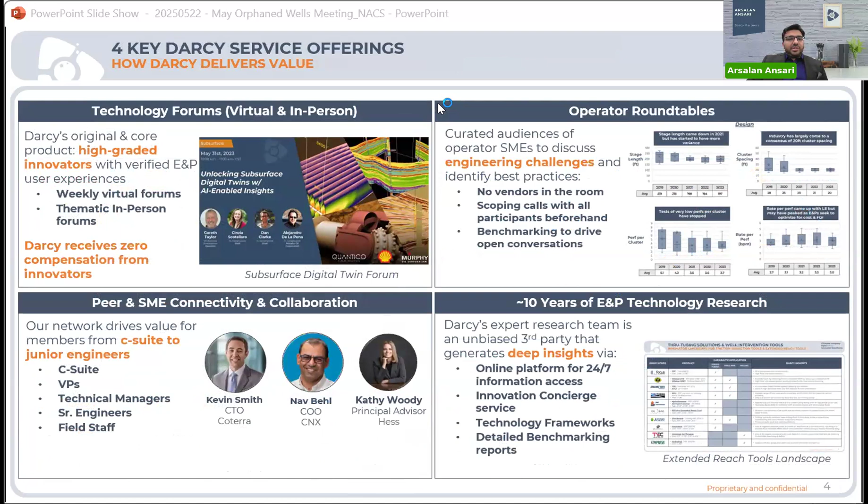We do this through curated technology forums, sometimes virtual and sometimes in person depending on geographical locations, operator roundtables, peer connectivity and collaboration on industry challenges, and almost a decade of research across 4 key channels or research coverage areas, each with several specialized sub-channels, as shown in this slide.

So with tighter regulations and rising CCS activity, maintaining well integrity in plug and abandonment is increasingly challenging. Despite advances in cementing, issues like surface casing vent flow and gas migration persist. Next generation P&A materials are essential for reliable, long-term gas-tight isolation and more efficient abandonment operations.

So let's have a look at some of the key trends for orphan wells with surface casing vent flow issues in the US and Canada.

While documented wells in regulatory reports number around 180,000, estimates suggest true figures could be as high as 800,000 for some of the unreported wells.

Canada, Ohio, and Pennsylvania lead in casing vent flow issues due to stringent regulations and active drilling. Oklahoma, Kentucky, and New York show moderate cases, while Alaska, Alabama, and Michigan report fewer cases due to limited drilling and operators complying with the relaxed policies by the regulators.

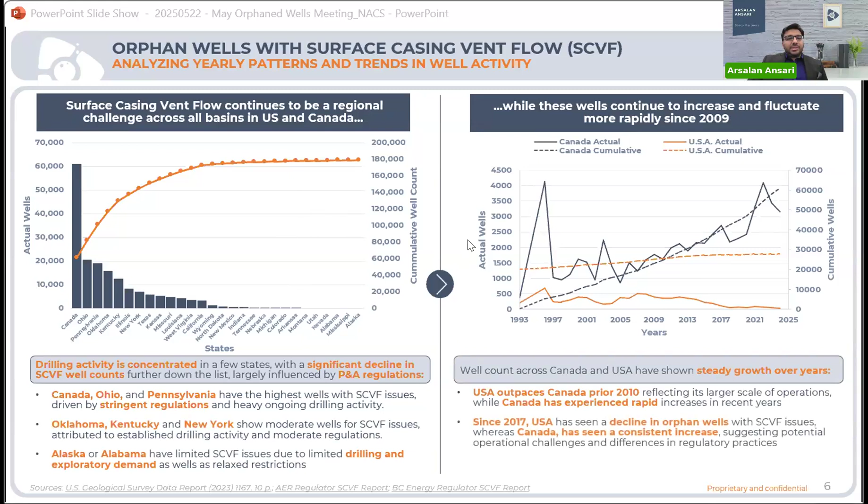Over the years, well counts for casing vent flow issues have steadily grown, with the US historically outpacing Canada prior to 2010. However, since 2017, the US has seen a decline in orphan wells with casing vent flow issues, while Canada's numbers continue to rise, pointing to operational and regulatory differences.

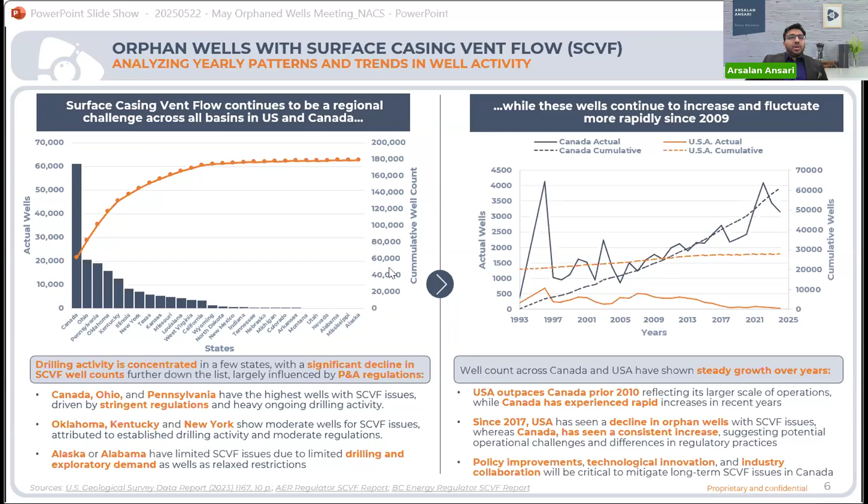Moving forward, addressing these challenges through policy improvements, technology advancements, and industry collaboration will be key to mitigating long-term casing vent flow risks. Also, it's estimated that 66% of more than 900,000 onshore oil and gas wells are marginally productive or nearing the end of their life.

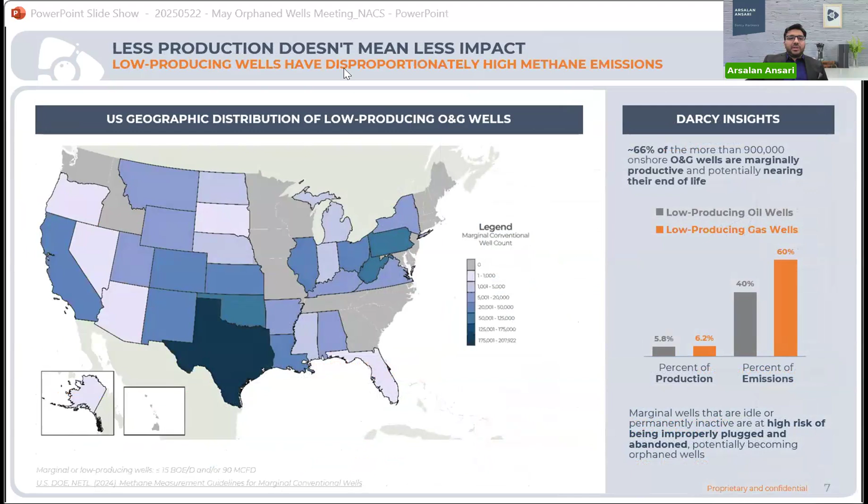These idle or permanently inactive marginal wells face a high risk of improper plugging and abandonment, increasing the potential for orphan wells. Now let's explore some of the operators' perspective on plug and abandonment challenges.

In a recent Darcy Forum poll, regulatory approval and compliance emerged as the biggest hurdle, even with growing CCUS activity. Operators are shifting towards cost-effective, rigless PNA methods. About 37 to 42% of operators aim for rigless decommissioning using lightweight vessels, resin-based plugs, and remote monitoring. However, concerns remain around the long-term reliability of these lower-cost solutions.

Meanwhile, 32% of operators focus on plug durability and 26% on well integrity or CO2 storage. This shows that PNA is critical for future energy applications like CCUS and geothermal, driving demand for next-gen sealing materials, expandable plugs, and AI-driven monitoring.

On the right-hand side, we look at the CCUS activity trends, and we can see adoption is accelerating with near doubling of advanced stage facilities with a 60% rise in construction activity. But infrastructure bottlenecks, supply chain constraints, and policy gaps create regional disparities.

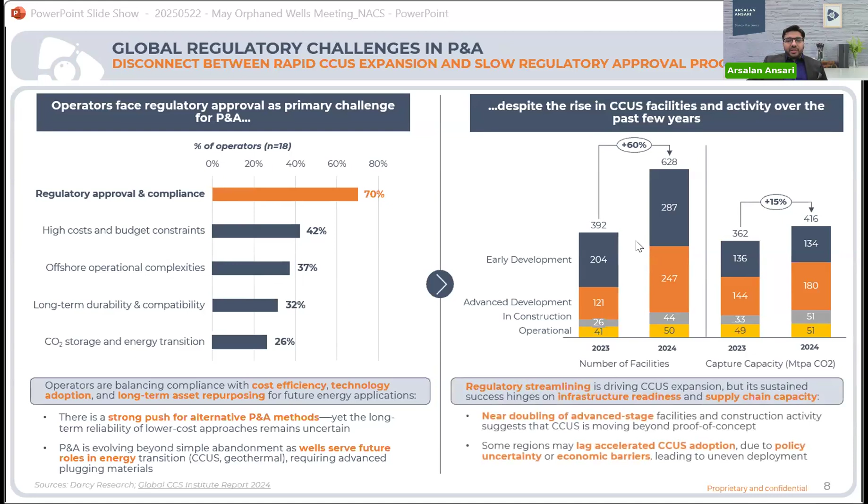Moving forward, PNA is no longer just about abandonment. It's about ensuring long-term well integrity for energy transition. Advancing policies, technology, and collaboration will be key to tackling these challenges, especially to align regulatory frameworks with rapid CCUS growth.

Now let's switch gears to evaluate global regulatory challenges in plug and abandonment. Non-routine operations where alternatives to cement are used require deviation requests, extensive documentation, and strict verification, leading to delays, adding regulatory burden to operators. While US regulators allow variances for novel decommissioning methods, long-term well integrity remains the top priority.

Overall, in a nutshell, regulators are beginning to accept alternative materials for permanent well stability globally, and advances in resins, polymers, expandable plugs, and bismuth could lower costs, but there's a slow adoption rate with limited field trials.

Next, we'll take a moment to review the key challenges operators face with plug and abandonment materials, as current solutions often fall short to address the problem effectively. A permanent well barrier must provide a tight seal, precise placement, and long-term stability against mechanical, thermal, and chemical stresses.

Firstly, plugging materials should have very low permeability, almost less than 10 microdarcy, and must bond effectively with casing cement and the rock formation to prevent leaks. Interestingly, field trials show that smaller incremental applications can become better than large slugs, but this sometimes conflicts with the operator's preference for faster P&A operations and cost cutting.

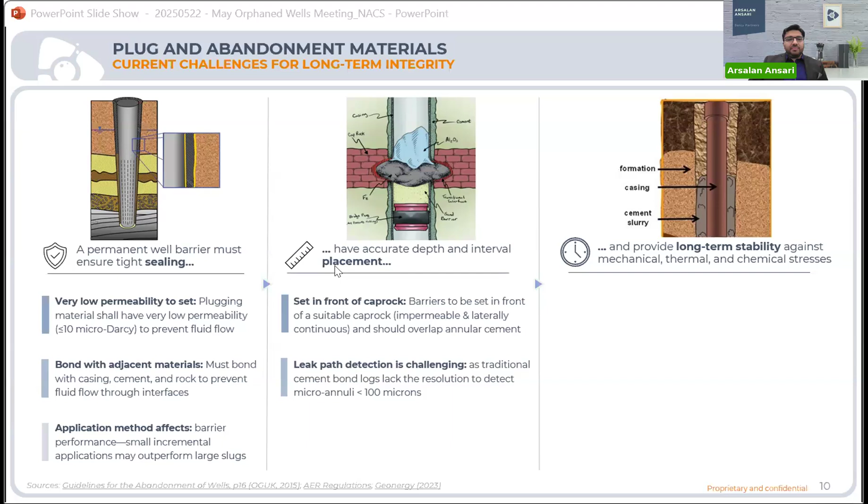Secondly, barriers must be placed in front of impermeable cap rock and overlap existing cement. Again, the challenge is detecting the precise leak paths, which is difficult since traditional logs can't identify tiny microannuli. Regulators emphasize sealing external paths, so placing barriers outside the casing is critical, but yet challenging.

Finally, barriers must resist degradation from pressure cycles, temperature changes, mechanical stress, and chemical exposure. Ultimately, ensuring long-term integrity requires precise placement, thorough testing, and confidence, ideally with reliable monitoring or self-healing materials, as current solutions don't guarantee permanent sealing.

Now let's switch gears to explore the evolution of P&A materials ranked from left to right based on long-term integrity and cost. Starting with cement, the most widely used material, but prone to shrinkage, cracking, and gas migration. Innovations like microfine self-healing and expandable cements aim to improve its sealing performance, along with thermal cement specified for oil sands. Innovators in this space include Astrimar, Expro, Trican, Schlumberger, and Baker.

It's important to clarify that cement remains a fundamental component of well abandonment and integrity management. And the technologies discussed here are not replacements for cement, but rather complementary solutions that address specific challenges such as sustained casing integrity, gas migration, and healing requirements, where enhanced sealing is required, not as a full-scale replacement for cement.

Next on the list, we have non-settling grouts and bentonite that offer sealing, self-sealing properties and are well suited for temporary abandonment, but they can swell excessively and shrink in dry conditions. Companies like BeneTerra and FloPetrol are advancing these solutions with moisturized and self-healing bentonite blends.

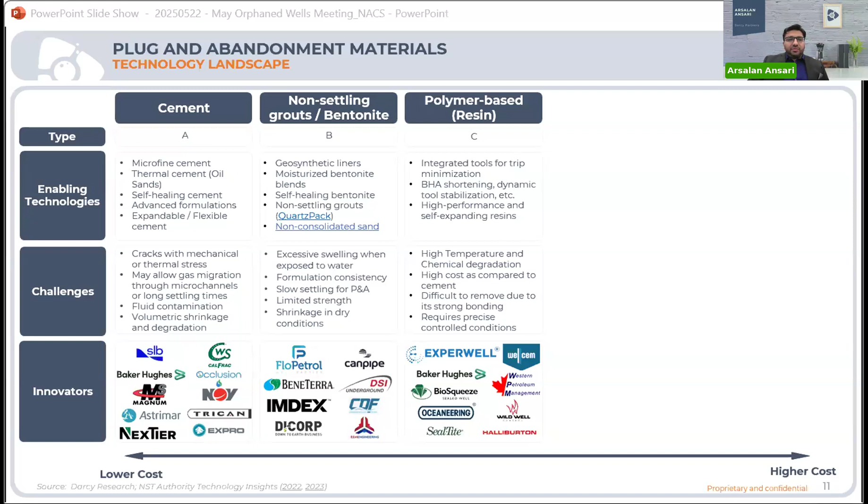Thirdly, we have resins or polymer-based plugs. These provide particle-free, high-strength sealing, but come with challenges like high cost, difficult removal due to strong bonding, and the need for precise curing conditions. Companies like Experwell and Welcem lead in this space with thermosetting polymers.

Fourthly, we have the elastomer-based expandable plugs that include expandable liners and rubber-like polymeric plugs, offering flexible sealing but have possibility of degrading under extreme pressures. Advanced formulations like thermoplastic elastomers and advanced rubber compounds are improving longevity with innovators like Weltec, Pinnacle, and Winterhawk.

Lastly, we have the thermite and bismuth-based alloys that create metal-to-metal bonds for permanent sealing, leveraging bismuth's low melting point, high density, and expansion properties in sustained casing pressure scenarios. However, they do not replace the fundamental role of cement in well abandonment. While promising, these solutions face challenges with scalability and reaction control. Notable innovators in this space include Interval, BISN, Isolate, and Wellstone. The landscape of P&A materials continues to evolve with the goal of reinforcing cement's performance rather than eliminating its necessity.

Taking a step further, we compared innovators in this space, focusing on the technology benefits and considerations for each of the bismuth-based plugs. Interval stands out as the only provider using thermite to create a permanent gas-tight barrier by melting casing and cement with the thermite reaction. Benefits include open-hole sealing without section milling and high barrier placement confidence. However, there are high temperature considerations and one-shot limitations for re-entry of these wells.

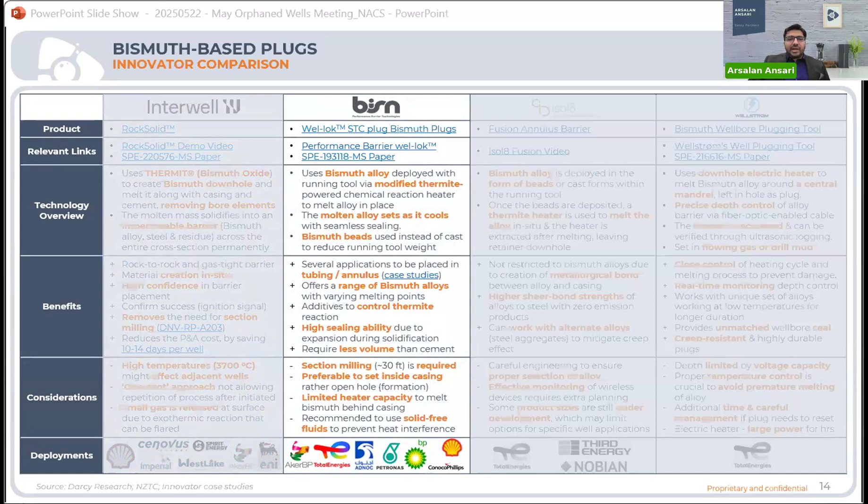Thirdly, we have Isol8 that uses bismuth-based alloys with high shear bond strength to steel, ensuring zero emissions. They have successfully been deployed in 9 trials with Total, Nobian Energy, and others, but selecting the right alloy is crucial for effectiveness.

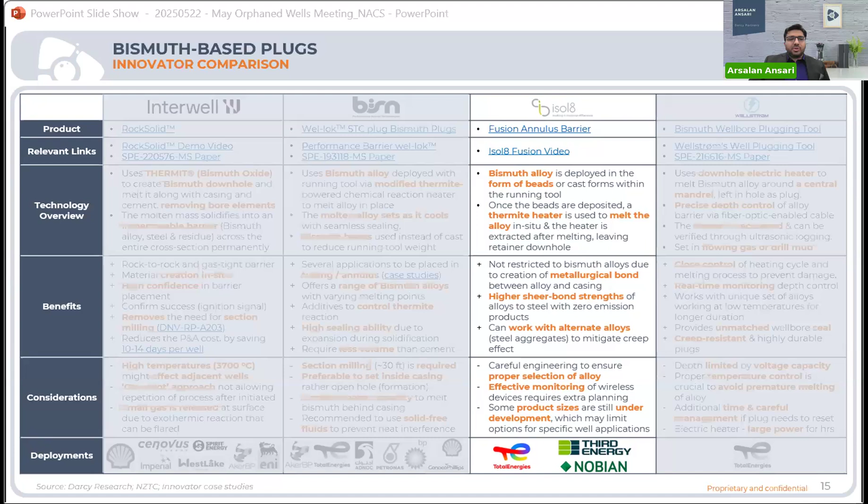Lastly, we have Wellstrøm's technology that's currently in trials with Total Energies in the North Sea, but it offers precise depth control using a downhole electric heater to melt bismuth alloy. However, plug depth is limited by voltage capacity in deep wells beyond 4,000 meters, and careful temperature control is essential.

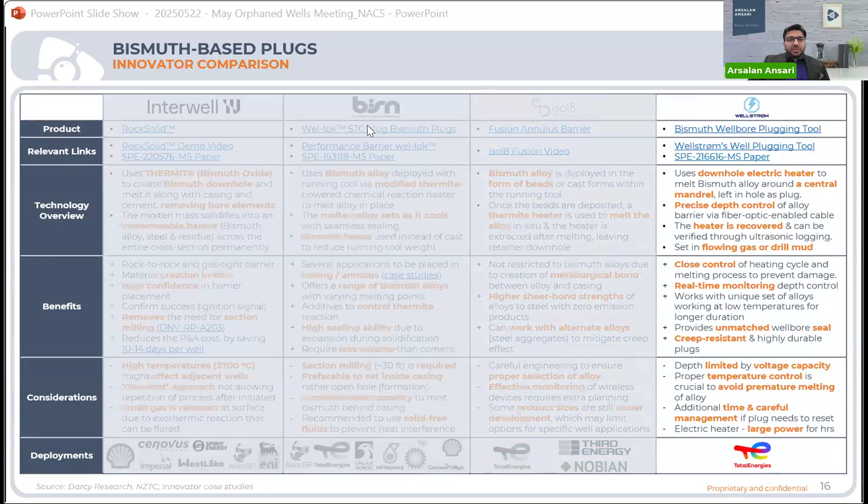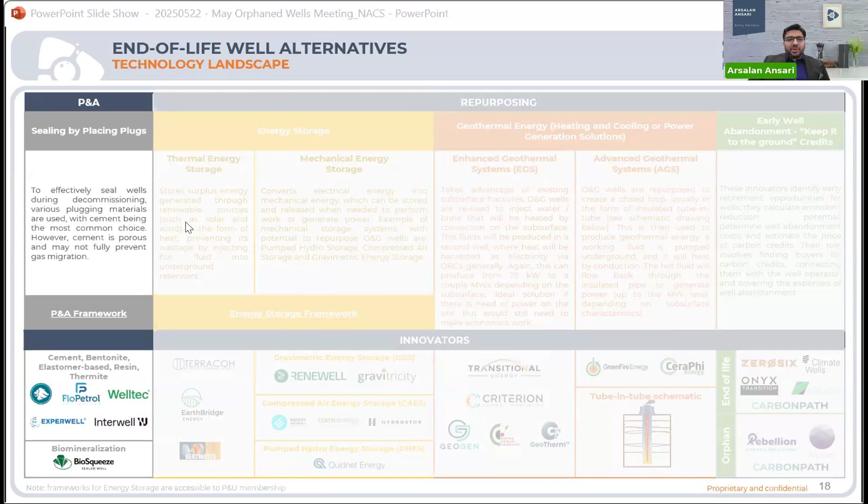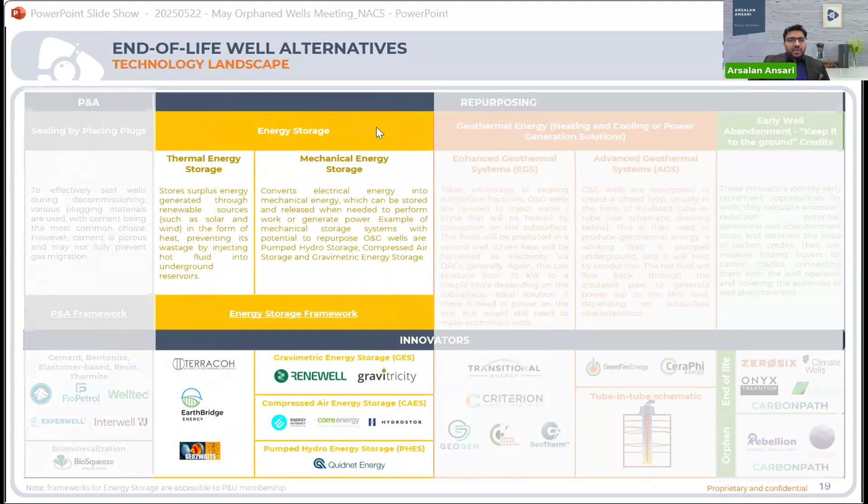Thermal energy storage stores surplus energy generated through renewable sources such as solar and wind in the form of heat, preventing its wastage by injecting hot fluid into underground reservoirs. Innovators like Renewell have been expanding in this field.

Thirdly, we have geothermal energy that takes advantage of existing subsurface fractures. Oil and gas wells are reused to re-inject water and brine that will be heated by convection on the subsurface. These fluids will be produced in a second well where heat will be harvested as electricity via ORCs generally. This can produce from 75 kilowatts to a couple of megawatts, depending on the subsurface. An ideal solution if there is a need of power on site, but would still need to make economics work.

We also have advanced geothermal systems where oil and gas wells are repurposed to create a closed loop, usually in the form of an insulated tube, as shown in the schematic below. This is then used to produce geothermal energy as the hot fluid will flow back through the insulated pipe to generate power.

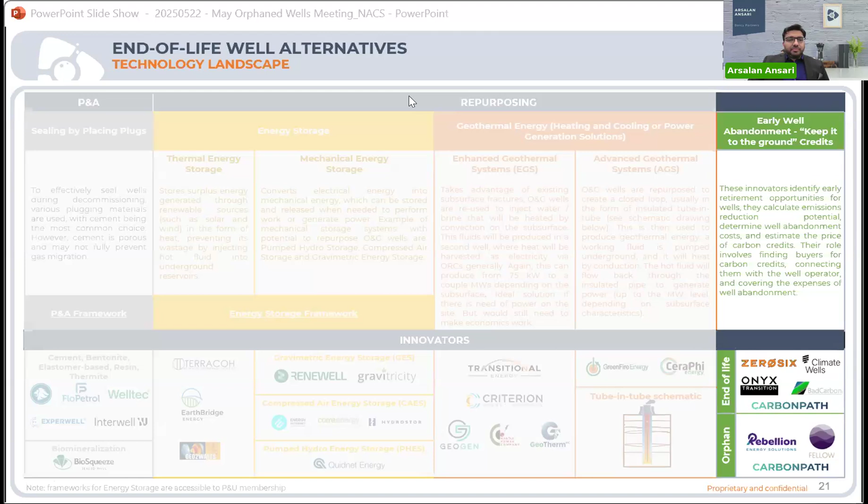Lastly, we have early abandonment, which is tied to carbon credits. These innovators identify early retirement opportunities for wells based on the emissions calculated, determining the well abandonment cost and estimating the price of carbon credits. Their role involves finding buyers for carbon credits, connecting them with the well operator and covering the expenses of well abandonment. These solutions show how P&A is shifting from a closure activity to an opportunity in the energy transition.

So to wrap up, I would share this is one of the Darcy events that was conducted a couple of months ago.

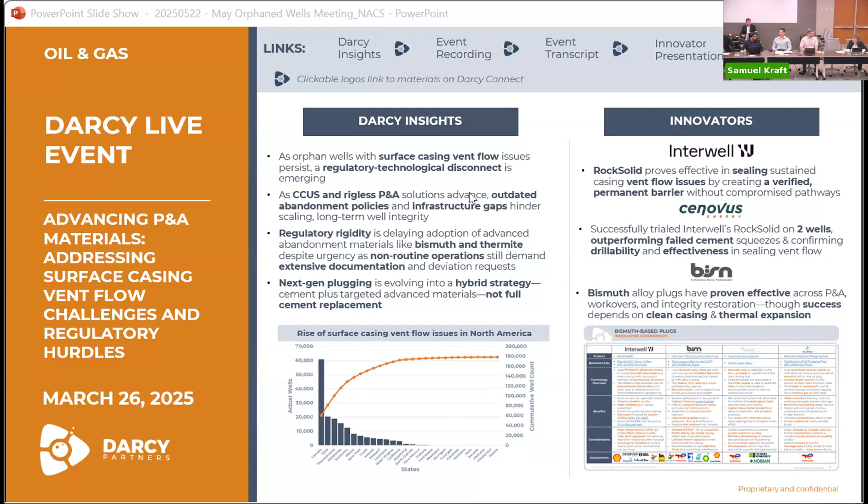I have a question. You mentioned a technology that melts the casing, the cement, and the rock. What technology is that? There's been similar discussions around in Pennsylvania, but I don't think, to my knowledge, we use that. Are there any places where that's been used? It has been heavily deployed in Canada, about 50 to 55 wells, with multiple operators. In the US, it's still under trials with some operators, but hasn't been tried extensively in the US.

It's more of a trial because of the CCUS projects in Canada, to utilize some of these wells as future CO2 storage. That's been deployed mostly to address annular pressure issues - any surface casing vent flow issues, high annular gas migration pressure - and it has proven to provide 100% leak resolution there. The only challenge is sometimes operators are more concerned about getting a second leak value that comes below the remediated interval. That's where they're concerned about re-drilling these thermite plugs and not being able to re-enter back into the same hole. So that's the biggest consideration operators and regulators weigh while deploying some of these plugs.

In the 50 to 55 cases that were successful, what kind of pressures were they dealing with? Is there any limitation? They have had - no, they're not limited by pressures or temperatures. They've seen pressures go up to 2000 PSI and dealt with that. And when it comes to deploying this for re-entry of these technologies, Cenovus Energy has tried and drilled back one of their plugs successfully and covered it with the liner. So that has been successfully tried. Thank you.

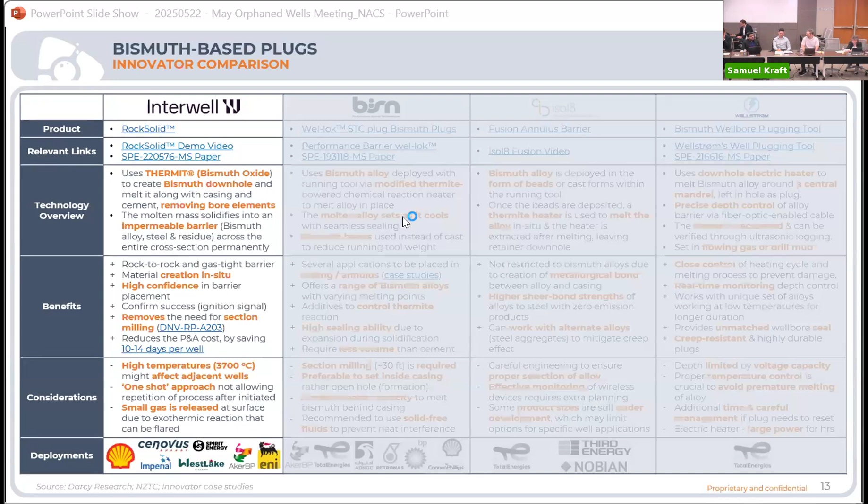Adam? Thank you, a great presentation. I wonder what you can share on costs, either actual costs if you can share those, or relative costs. With Darcy Partner, we provide more of an innovator comparison - a cost comparison between the technologies, which will be a multiple of like 1x or 2x, how each of these technologies compare to each other. But the actual cost comes when the vendors connect with the operators or someone who wants to deploy the technology, so normally we don't have the cost component shared at Darcy.

Can you speak at least relatively, which of these costs more and which costs less? Oh yeah, definitely. So Interwell and BISN have been almost 2x the price of what we have for the other ones, but relatively it depends on the application, it depends on how many plugs have to be deployed because it's a cost per plug. So it again depends on that, it depends on the conditions as well.

Can you speak at all to what percentage of a plug job cost is these technologies versus other things like labor? They come as a package - when we have our interview conversations with them, they come as a full package with regards to labor, rental equipment, and material cost. It's a lump sum cost that's offered, not like a cost per barrel or cost per footage, but a lump sum cost per plug.

And then they also have, depending on how many plugs are required in a well. As we mentioned, this technology cannot replace cement—it's used only for a specific application, just to seal off any casing vent flow issues or gas migration issues.

The testing that they've done with this, did they ever try to maybe drill out the plug once it was installed, or with the melting of the casing in that one example, is that just something that would be way too difficult?

So with their first trial, as I mentioned to Catherine, they had an issue with their plug not being able to seal and finding a deeper leak point. The micro-annulus had a second leak path. They had drilled it with a conventional bit - or was it a bit or a concave mill?

So they were able to drill it out and got back access to the entire wellbore, and they went deeper and did a second plug that was able to seal off the vent flow path, or the gas migration, that was coming to surface. Okay, thank you.

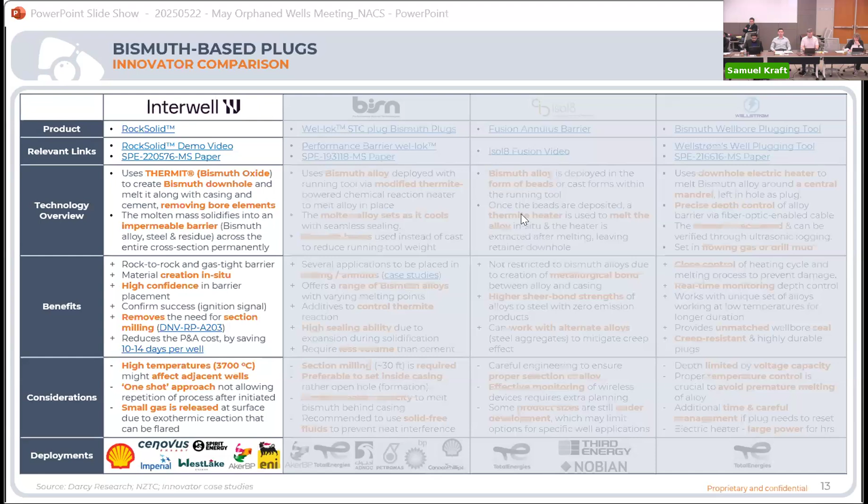We have a question from the online audience from Zach at DOE. Is that somebody we can plug in here? Here he is. Zach, can you go ahead? You're muted if you're attempting to speak. Can you guys hear me? Yes, we can hear you, Zach. Okay, great, sorry about that.

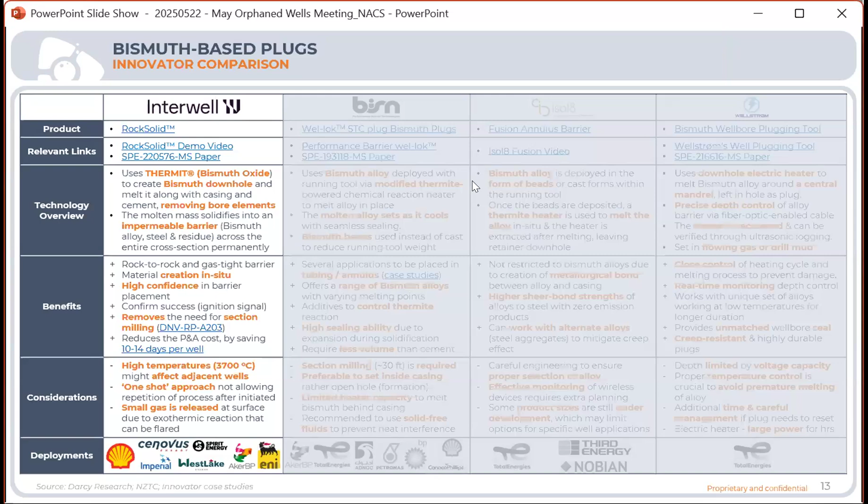When you say long-term, what exactly does that mean? Because at the site where I'm out here, we have to model and calibrate our PA to 10,000 years. With borehole permeability going anywhere up to about 200 years, especially in the area we're out here in Carlsbad, which is a huge oil and gas boom area, it's a concern of ours, because with all the oil and gas activity around our land withdrawal site, along with our existing wells, we fear that we're eventually going to end up with one water table. So with these additional new materials and methods, does it extend the lifespan of borehole permeability?

Great question there, Zach. 100%, I agree that when it comes to long-term, we don't have a timeline that's a guarantee, because of a lot of different challenges. For example, for some wells in Canada, there's a lot of nearby seismic activity that operators are faced with challenges because of the impact on their orphan wells. When it comes to defining the exact timeline, we've had discussions with operators, and there's not a defined timeline that they have mentioned or modeled.

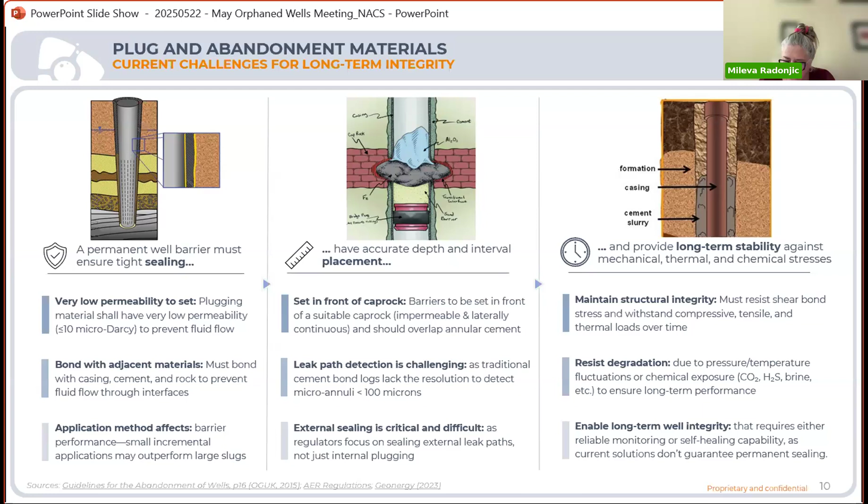Okay, thank you, Zach. Any other questions? Mileva, you've had your hand up and down through the morning. You have a question? Yeah, I thought we should give priority first to non-committee member audience. Yes, few things. Well, thank you very much, Mr. Ansari, for a very comprehensive overview of some of these materials and technologies.

Just to clarify, your company is not actually involved in any research or testing or application of these materials, correct? 100%, yeah, we are just researching and doing an overview of these technologies. We are not involved in the trials. We are getting to know from the operators.

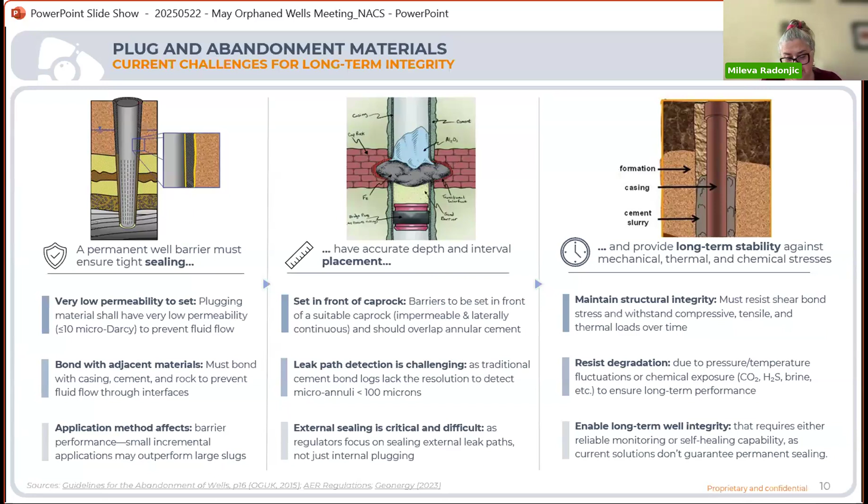Most of these have actually been shared at the SPE P&A forum in 2019, and these technologies have been thought about or tested in some places, probably for the last 10 years. On heating metal to metal, you might form a bond and seal there, but that heat creates potential issues for any water-rich materials such as clays and any cement that might be there, which do not do very well when superheated.

So I think I agree with Zach. Before we start giving seals of approval on these, probably some documented research is needed. I think it's a great compilation, good to see that these things are being initiated. As I said, some of them have already been in process for a while. But before we can start answering some of these long-term questions, the API standards on testing cements are a good example of how much testing is needed before we can say with certainty that something can last 50 or 100 years, like in the case of cement. So it was more of a comment than a specific question.

Thank you, 100%, I agree with you, Mileva. The high temperature concentrations are a concern for any nearby adjacent wells, because the temperatures go up to like 3,700 degrees Celsius. Lab testing, as per API standards, has been carried out, and we'll try to share that research at a later time with the team here.

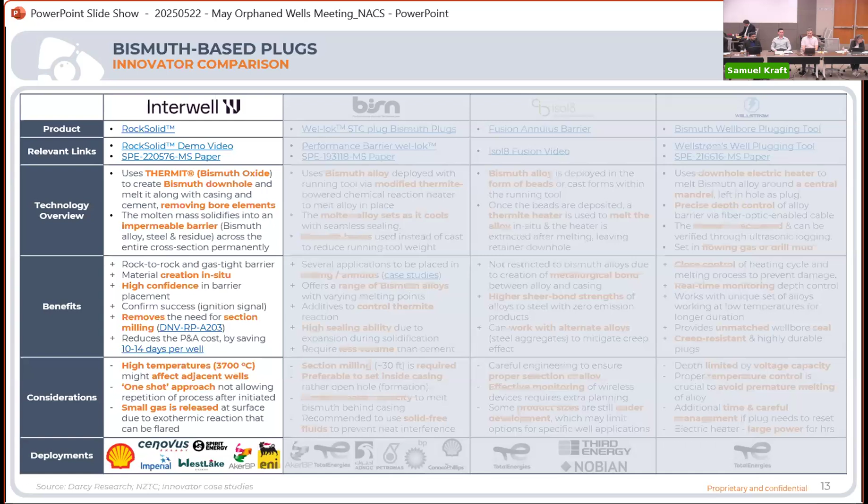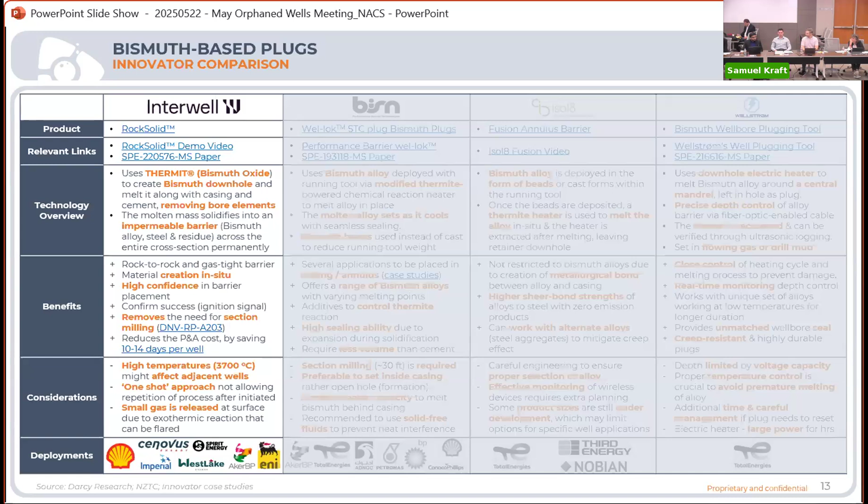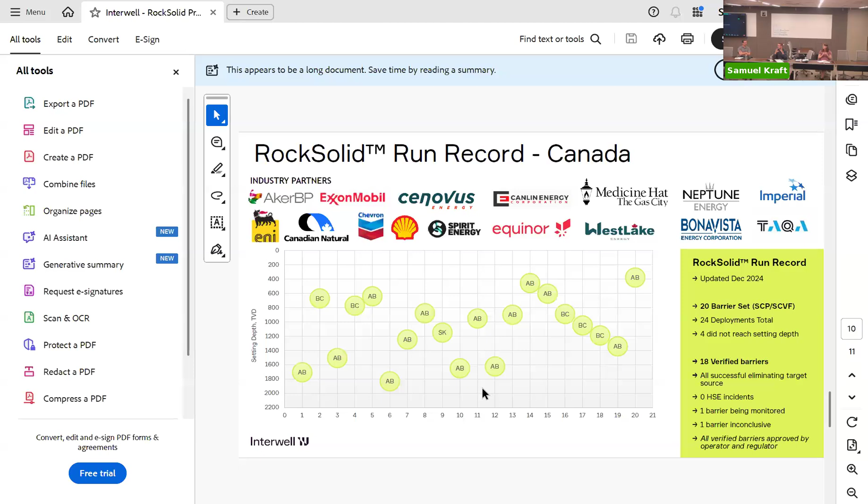While he's looking that up, I would just like to comment. This is Jim from Michigan, manager of the Orphaned Well program. I just want to make sure we all understood, because it was only briefly mentioned, that these materials and methods are not replacing plugs. They are being used to augment cement plugs.

That's a really good point, that is excellent. I don't think of them as going to be the new plugging material. Right, they're just options to assist in augmenting cement plugs. 100%, yeah, it's not a complete replacement solution, just one consideration for tackling one challenge at a time.

But Matt, here we have some of the records for the Interwell wells that have been carried out in Canada, with the different setting depths and the number of years. This technology started trials in 2020, so it's been around for 5 years now, with some partners or industry operators deploying it in their wells. We'll get a deeper dive on the other solutions as well, for how many wells have been tried.

Could I just ask, how is this put in place? Is it a wireline pump? How is the plug generally set? Oh, so it can be done by E-line mostly, but it can be done on drill pipe as well.

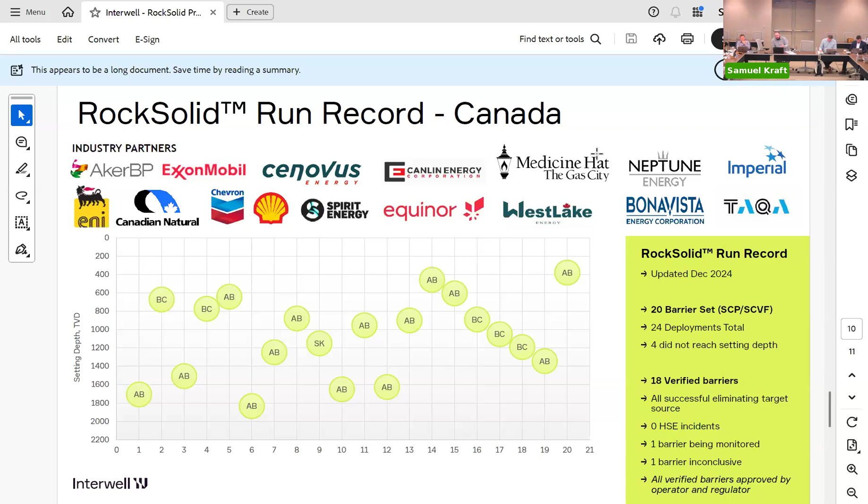David? A question comes to mind when I look at the run record. You had mentioned something about Interwell having a monitoring package. Is that associated with this, and can you speak more to what that entails?

So basically, once they have the plug in place, they have a post data acquisition package with barrier verification systems that are run based on some of the noise logs, cased hole analysis tools, and some of the pressure and flow data. It's a combination of different methods for data acquisition they've been carrying out, which ensures that this well has been integral and continues to be integral for the remaining years.

Okay, so it doesn't stay in the well. This is something they do periodically, so they don't cut and cap or bury it. Okay, so it's not really passive. No. Okay, just out of curiosity, how long do they monitor for?

Right now, let's say the oldest well has been monitored for like 5 years, but again, it depends on the contract or how the services are still being utilized. So it depends on that.

I'll echo the previous comments, it is a comprehensive overview of what's out there. That's kind of the task, looking at current and emerging technology, not to say this is the answer, but what is there, and what can we do to maybe continue to advance it in the future, right?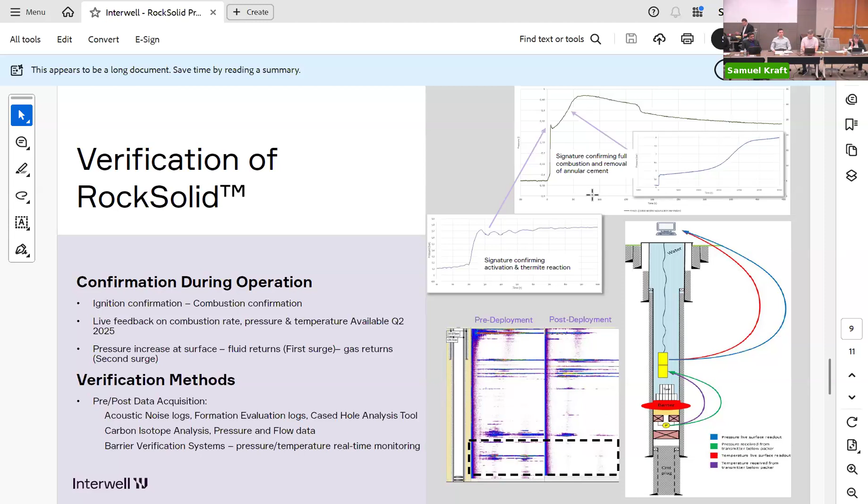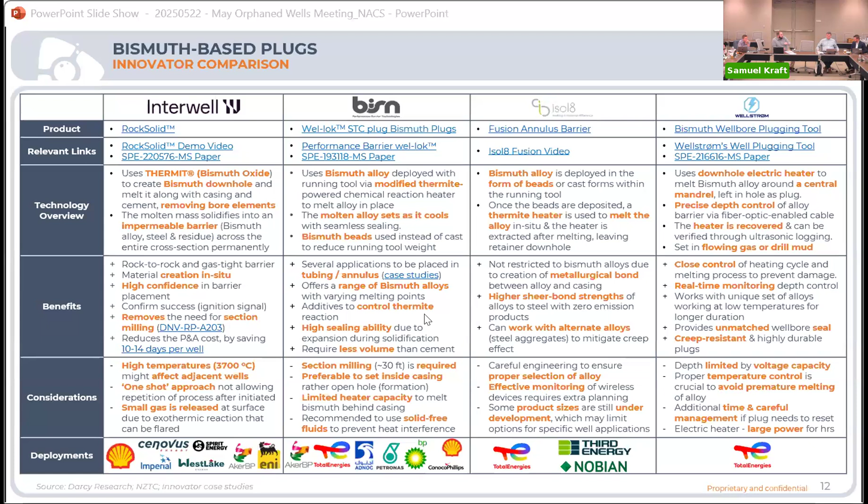There's quite a bit around polymers, resins, hybrids with resin and cement, all kinds of different things out there. So a comment off is kind of where do we draw the line for this scope, because in the technologies chapter we talk about how there's so much out there. This just scratches the surface, but obviously we want to high grade what are the biggest hitters. So maybe it's more for the committee and subcommittees to kind of handle.

I'm not sure if that's the committee's job, or the industry's job. I don't know if any committee member would want to take that on their shoulders. No, what I'm saying is what do you put in the report as far as that. I don't think that's also our thing. I think our thing is to open pathways of innovation and let the industry innovate.

What's successful, what works, what's economical, what is fit for purpose, not- I don't think that's hard for us as committee members to understand that nuance. I think these guys have done a good job of explaining some of that nuance yesterday.

I'll weigh in on that a little bit. What I think the committee does have is a role to help identify, and this ties in with our conversation yesterday on avenues of failure. The committee, I think, could identify areas where advancing technology would be productive.

Yes, like we're seeing leak paths of this kind, or we're seeing, you know, we've been using these, and that goes back into doing some of the basic analysis of, if our plugging is largely successful, well where are some areas, identifying the problems and challenges? Because that points you to where, not to specific solutions, but where research might be needed, research verification.

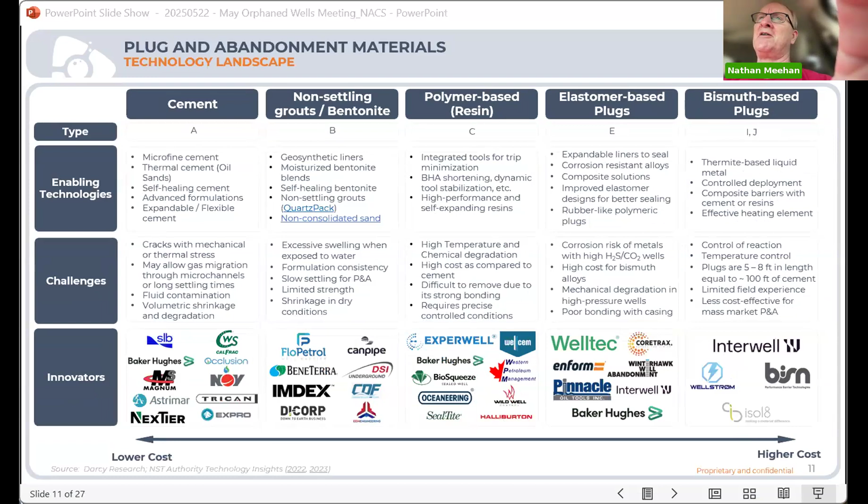My concern is that we are not doing enough to encourage innovation in the space. One reason we've got such great cements in the oil field business is because people are willing to take risks and try a variety of things. Oil field cements have advanced far faster than building construction has, because people have very conservative approaches, and that's where we are in the regulatory space. I don't know how to balance that need to encourage innovation and testing alternatives with the inherent conservatism. It's like my old manager who wanted proven new ideas. I think there ought to be some mechanism to accelerate testing and encourage innovation without necessarily onerous penalties, and I don't know the format for that.

Maleva, I would love to have that be university research, I'm sure, but we'll see. If you've got good ideas in that space, I would sure want to encourage them.

I have a question from Dwayne. Thank you, Missy. Arsalan, thank you for the presentation, I appreciate the comprehensive overview. There's one other technology I've heard of that you didn't discuss, do you have any insider information about it? The idea was to inject a scale-forming liquid or some other blocking fluid directly into the formations that would otherwise flow, so rather than just plug the pathway or the borehole, you plug the formation itself directly.

Are you familiar with that, any insider information? Is it similar to having a polymer type fluid injected into the formation? Yes, there are a couple of variations. One uses the same sort of water control technologies we've used in the past, and the other intentionally creates a scale - it's sort of the opposite of dissolving scales, it precipitates a scale.

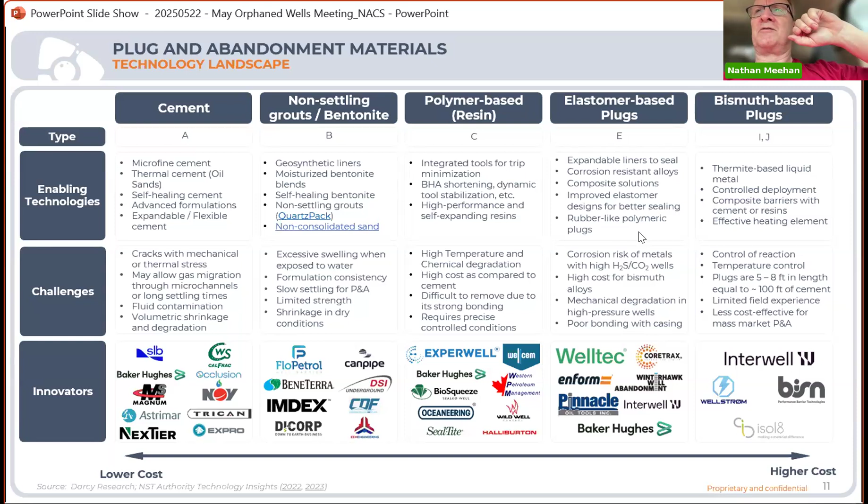Thank you, I actually have a little insight on scale formation with injections. They had great results plugging up big holes and perforations, but didn't get scale propagation through small cracks. So it probably wouldn't plug microannuli as effectively as it would plug perforations. That was just that example.

Maleva? Yeah, the question was how we would test this and how we can move forward. Talking to various people from industry, academia, and national labs, you sometimes get a really good idea, good technology with a good scientific and engineering base, but it fails because of a bad business plan, not because it's a bad solution. Equally, some really bad solutions have a good business plan and proceed - not just in P&A and materials, but in every aspect of human activities.

So that's a general comment. More specifically, are we doing this kind of testing? I know that we actually are. If you look at the national labs, from NETL all the way across to the West Coast, we have several labs with amazing capabilities in both robust modeling and testing of these materials. One study that comes to mind is after the BP Horizon spill, NETL teamed up with several operating and service companies and did comprehensive testing on foam cement, etc. So we do know how to do it, we have the means of doing it. I think at some point it's just the motivation to do it, and funding.

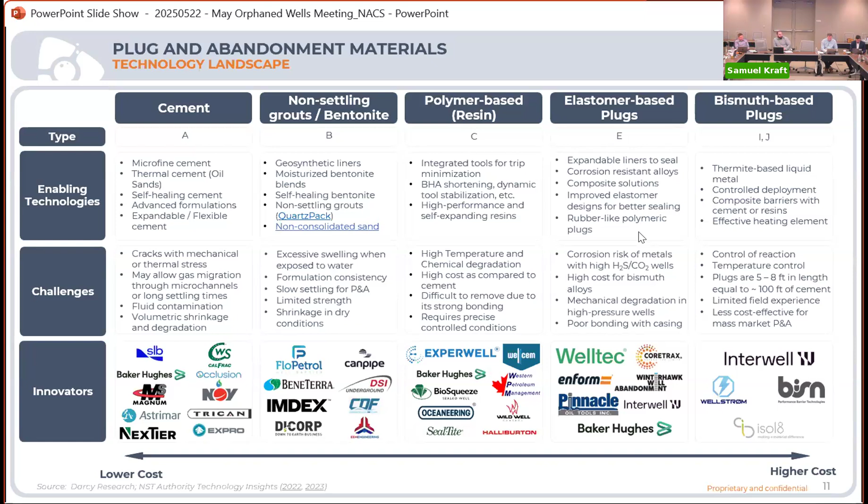I think this pivots off a number of the comments, because what hasn't been mentioned much from the regulators is whether there's a methodical process to move from technology, through marketing and everything, to actually being approved through the regulatory system. I've had some occasion working on that at the federal government level and in some studies, so I'll share a couple bits of information before getting into my opening for the discussion.

For instance, on methane monitoring, DOI, EPA, and the Pipeline and Hazardous Materials Safety Administration all have different criteria for implementing new technology. There's no way of standardizing technology across these different agencies, which creates a real inhibitor. I'm hearing the same thing elsewhere, granted recognizing that states have different geology and environments, which could impact it.

But wouldn't it be nice to have a system where you could move across states? I think there are some mechanisms out there—somebody mentioned that states, and I remember from when I worked in regulation, we referred to API standards. Just a quick heads up, I know we have somebody from API on the line.

Just to be fair, API has a lot of different groups—they have a whole standards group, and then groups that work on policy and other things. If our API colleague on the line wants to talk about the standards process, I think that's on our list for information gathering, to bring somebody in from the API standards organization to talk about that process. But those are pretty long processes.